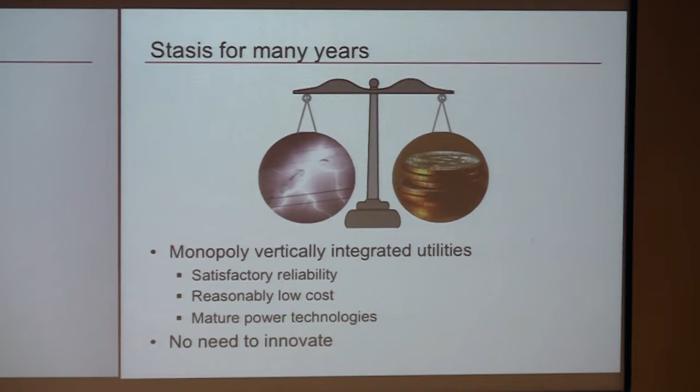And then something happened. We decided we need to go green. We need to reduce CO2 emissions. We need to integrate renewable energy sources, mostly wind and solar. So we went from having to balance just the greed and the fear to a three-way competition between cost, reliability, and being environmentally friendly. And we know how to keep the system reliable, balancing the reliability and the cost. But doing all three is much more complicated. We can be green and cheap, but we won't be reliable, or we can be green and reliable, but it's not going to be cheap.

So this whole business of smart grid, in my view, is really an attempt to do better in all three directions at the same time, essentially trying to improve the integration between those three competing objectives. Now, smart grids, lots of different definitions. We were talking about that this morning, and on my more cynical days I will say that people will define the smart grid as what they are trying to sell you.

I'll take a fairly general definition to say it's trying to use communication, control, and computing technologies to enhance the operation of the grid. The idea is that these technologies are a lot cheaper than copper, concrete, and steel that are the essence of the traditional power technologies. We can do things a lot more cheaply with smarts, communication, control, and computing than we can with building more transmission lines, building more power plants. So that's the whole idea, I think, of smart grids, but different people will define it in different ways.

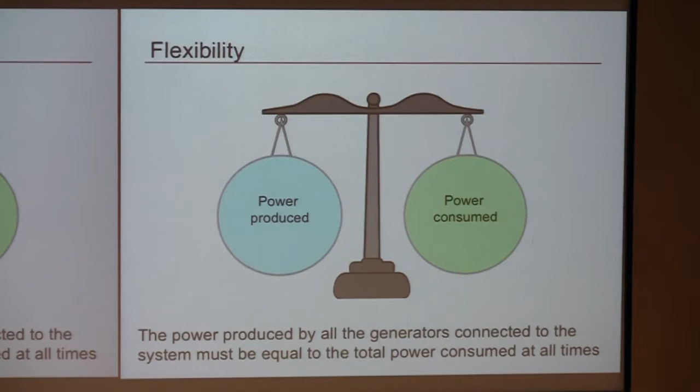So let's move on to flexibility. One thing you have to do, another balance you have to have in the power system, which is now a physical balance, is between the power that is being produced and the power that is being consumed. These two must be kept equal, essentially on a second-by-second basis.

So why does it have to be exactly equal? Is it because of storage? It's because we can't store, essentially the answer.

It's the ultimate in just-in-time manufacturing. The power that we are consuming now with this computer, these lights, is being produced almost essentially at this time. And if you have this imbalance, the frequency is going to drop and the system is going to collapse. So we don't want that to happen.

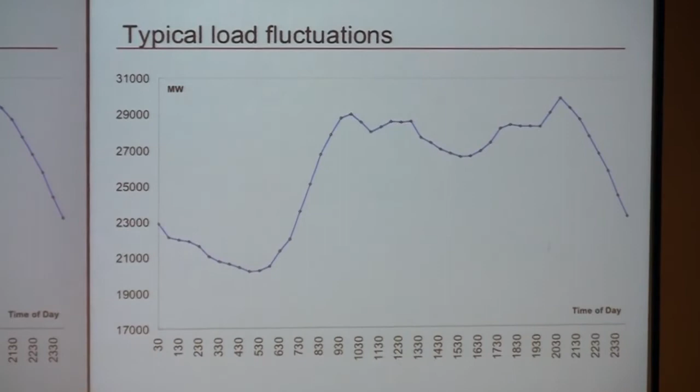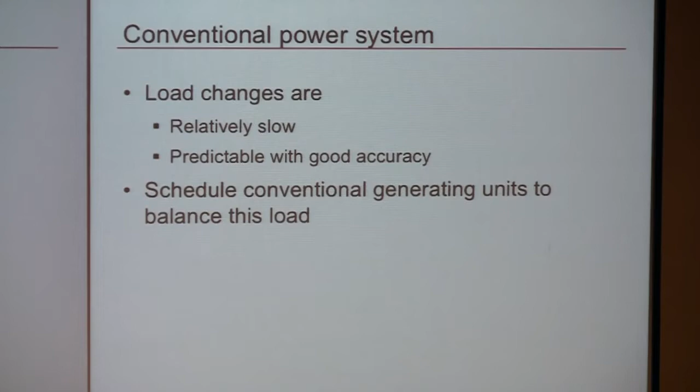So in the old days, these were the fluctuations we had to deal with. They were, you know, human beings, if you aggregate them enough, are fairly predictable. You could predict the peak demand for tomorrow with about a 2% error, even including errors in the weather forecast. And the ramps would not be too bad, so relatively slow changes, predictable with good accuracy. So we could schedule conventional generating plants, coal-fired, gas-fired, to balance this load. No big problem here.

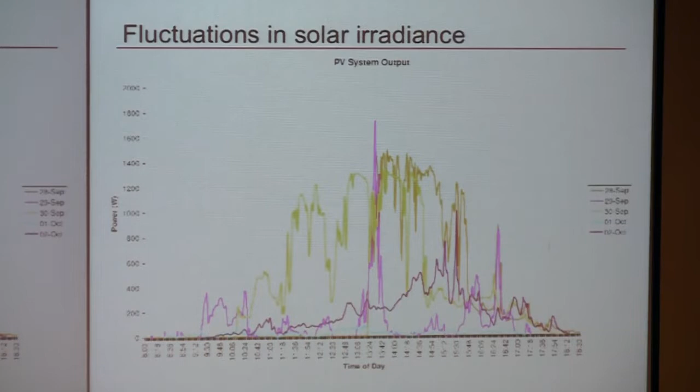But then we introduce renewable energy sources. Here I picked up a couple of graphs showing the output of a particular photovoltaic system on different days, with different days in different colors. You can see that different days are different, and even within a day it goes up and down depending on whether you have a cloud or you don't have a cloud. So you have very rapid and hard to predict fluctuations.

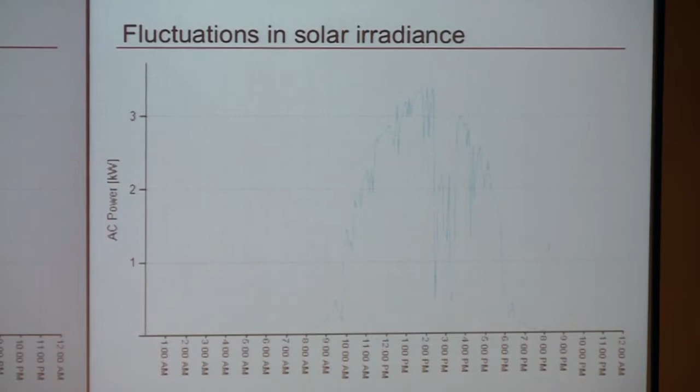Here's another example. Things look pretty nice. The sun rises, the output of the PV plant goes up, and then suddenly in the middle of the afternoon you have a band of clouds. It drops pretty dramatically and then restores. It goes back up and back down in the evening.

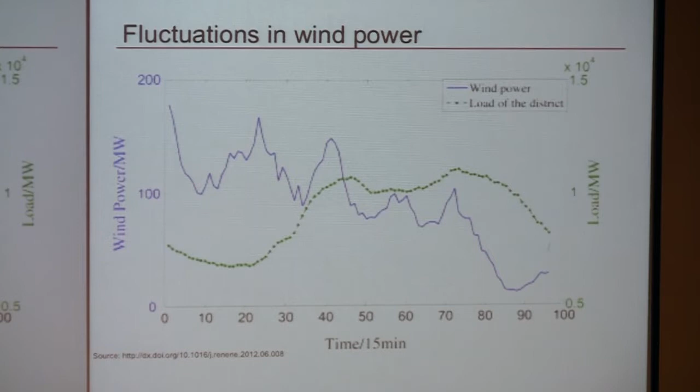And you also have problems with forecasting the wind. It's quite easy to forecast what the wind is going to be 15 minutes from now—your best guess is exactly what it's doing now. But if you try to forecast 24 hours, it's going to be pretty much all over the place. Not easy. So really, if we have a power system with more than a few cute wind farms or a few experimental PV panels, we may start having some interesting problems.

So instead of just looking at the load, now we should be looking at the net load, which is the difference between the load and what is produced by this renewable generation—which is essentially not controllable, which we let produce exactly what it wants to produce.

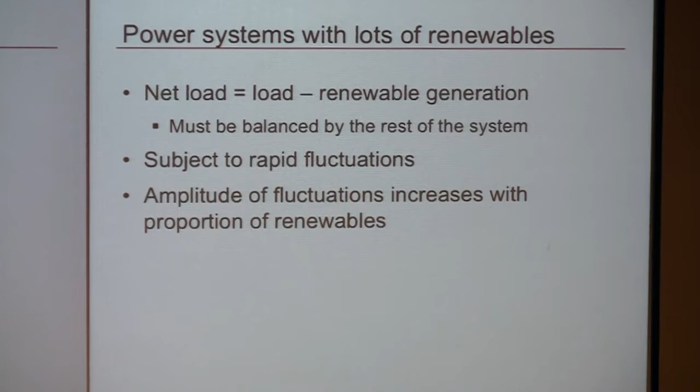And that net load must be balanced by the rest of the system. So your conventional generators are going to have to respond to those rapid fluctuations, and the amplitude of these fluctuations is going to increase with the amount of renewables that we install in the system. So over the future, we are going to have more problems.

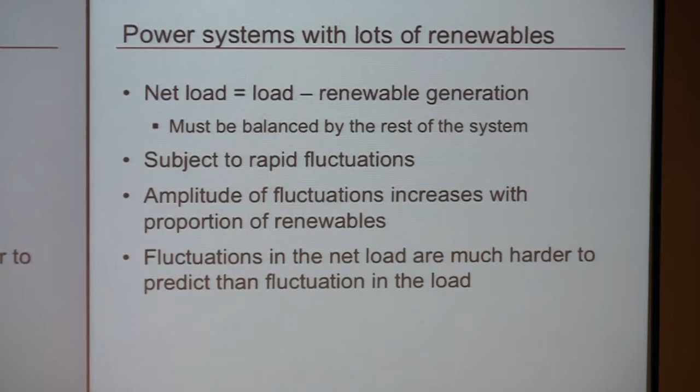And again, we are pretty good at forecasting what the load does. Forecasting what the wind generation, what the sun is going to do, is a much more difficult problem. So, how do we keep things in balance? Well, the standard answer is to say, well, the rest of the system is going to have to be more flexible. But providing flexibility costs money. That's something very important to keep in mind, because this flexibility is going to have to come from conventional power plants.

These conventional power plants, to keep them going, to get them going, you have to burn coal, you have to burn gas. If you have to bring online more of these conventional generating plants, it's going to be less efficient. You are going to be able to do a less efficient economic dispatch than you would be able to do if you could just predict what's going to happen and then not have to have this reserve to go up and down as the wind or the sun changes.

So the first question we want to ask is, well, how much flexibility do we really need? We could just say, I want a lot, because if I have a lot, I'll be on the safe side. And frankly, if you ask a power system operator, that probably would be their response, because they want to play it safe. Remember, reliability comes before cost from their perspective. They don't want to be blamed for an outage, so they want to have at their disposal as many resources as possible. But on the other hand, we are paying the bill, so we don't like blackouts either, but there's a cost to everything.

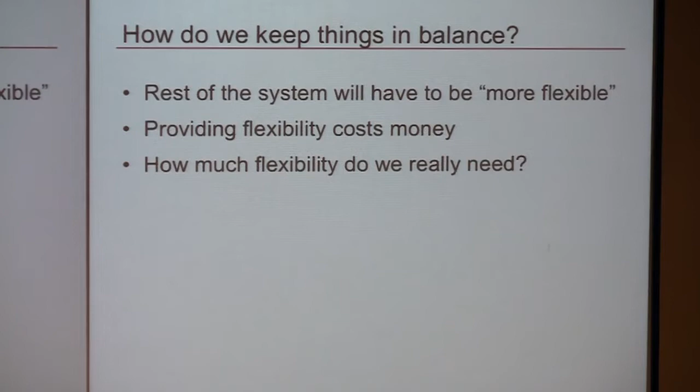The next question is, okay, let's suppose we know how much flexibility we want. Where should this flexibility come from? Well, typically it would be from these conventional generators, coal-fired, gas-fired. We can ramp them up and down. We might also try to get the demand, the consumers, to adjust their consumption in response to the needs. So if the wind is blowing hard, maybe we can anticipate and do the dishes now. If the wind is not blowing, maybe we can do the laundry later.

A lot of interest these days is going to storage, developing new battery technologies. That would be an extremely good form of storage if it were cheap enough. So chemical engineering, material science people have plenty of work to be done there to make that practical. Yes.

Storage, something they used to do in Belgium, with two lakes, you pump it up in the night and it goes back down in the day. Pumped hydro is still the more common economical way of doing energy storage, so it can be done. The problem with pumped storage is that the investments required are huge. The environmental impact is significant. There are not many places where you naturally have two lakes and a place where you can put the pumps and the pipes. So it's hard to justify. The technology exists, but it's a question of a technology at a reasonable cost.

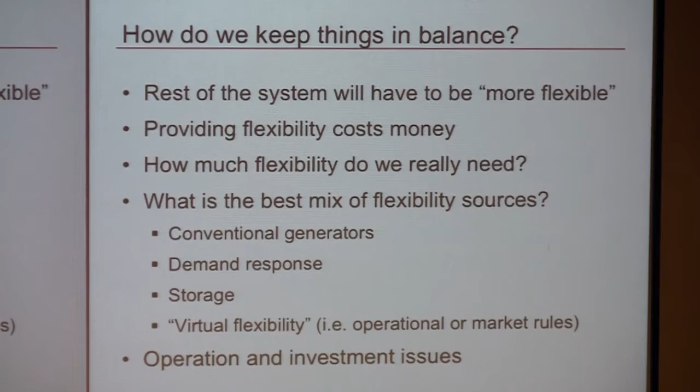So let's first talk about flexibility at the operational stage. Running a power system involves a lot of thinking ahead of time. You don't improvise, and there's therefore a lot of scheduling that takes place.

They think a lot today about what they're going to do tomorrow, because a lot of the power plants they use are large coal plants that don't start fast. To start them, you have to invest a lot of money in getting them going. So there's a lot of, in essence, an investment cost of getting that plant going tomorrow. So the question you have to decide is, which plant mix do I want tomorrow?

On one hand, I would want to run my most efficient plants, but on the other hand, I also want to have available the plants that I will need to go up and down as I face some uncertainty. So I need to figure out how much uncertainty I will face tomorrow, and then once I have an idea of that, try to optimize it, to do some kind of optimal scheduling calculation to decide which generating units I should start at what time.

Does the location of the plant matter too? Yes, because there's a network. But at this point, I'm going to ignore the network. I assume that I have a copper plate, that the electrons can go from any plant to any load for free. The real life is more complex than that, I grant you that. But for looking at flexibility, we'll ignore the problems that the network adds.

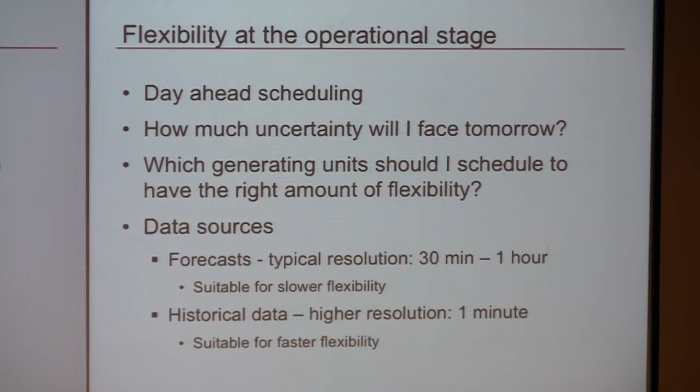So this is what we have been doing recently. My student and I got some data from Texas, where we got, I think, several years' worth of 1 minute resolution net load data from the ERCOT interconnection in Texas. Essentially, we know what wind generation there was and what load there was, and we therefore can calculate the net load with 1 minute resolution.

And that's the blue curve. But then you have what the schedule for the market was saying would be happening at each hour. And the difference between the red and the blue is the flexibility, the short term, intra-hour flexibility that we need to deal with. We assume that the market will take care of what happens every hour, but the system operator has to keep the system in balance in between those hours.

So if you take the difference between the blue and the red, you get a little diagram up here that shows the minute by minute values over every hour. And we assume that at each hour we are back in balance, and again we look at the flexibility needed for the next hour.

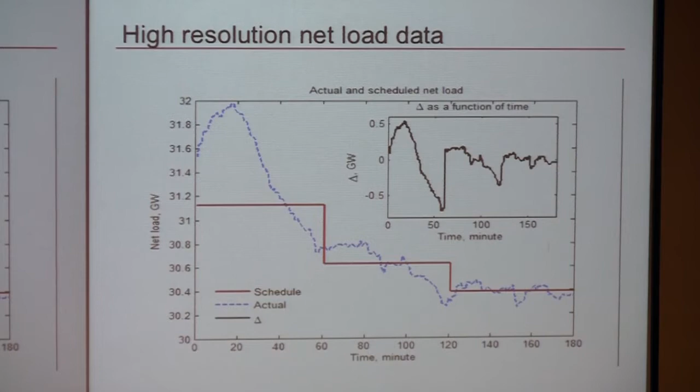So we take this whole, several years worth at 1 minute data, and we analyze this data. And we look at these variations. Really we look at three things: sometimes we need an increase or a decrease, so there's a question of capacity, megawatts. We have the rate of change, or the ramp rate, so that will be megawatts per minute. And whenever we have one of those ramps, we also want to know for how long it lasts.

So we analyze this data to look at events, and we represent these events by triads involving capacity, ramp rate, and duration. And if we plot that in a three-dimensional space, we get a cloud of points like here, representing the type of variability event, flexibility event, or lack of flexibility event that we had over this whole period. And if we have enough data, we get a probabilistic representation of what we should be able to deal with.

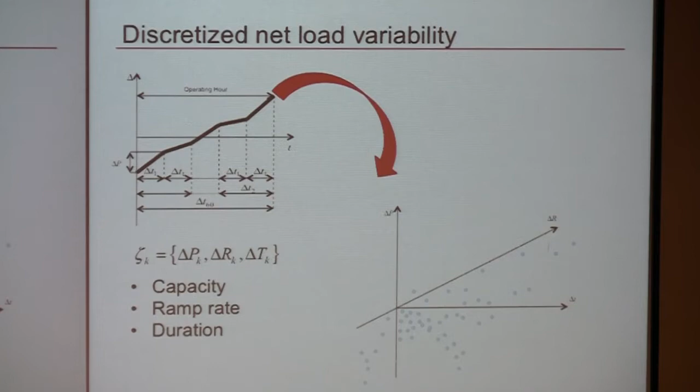So what we want to do is optimize the flexibility that we want to provide. We look at each of these data points and we try to figure out: should we include the ability to deal with this data point in our schedule for tomorrow? Or is this so rare that we decide it's not worth dealing with?

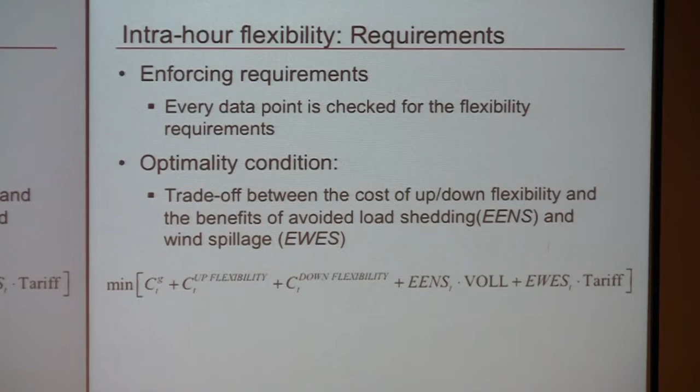So really we are looking at doing a trade-off between the cost of providing this flexibility and the cost of not providing this flexibility. Now, the cost of providing the flexibility has really three parts: the cost of producing the energy, the cost of the upward flexibility when we have an upward change in net load, and the cost of going down. Then we have these two other terms.

EENS is the expected energy not served, so that's a probabilistic measure of how many customers we will put in the dark for how long, because we don't have the resources needed to satisfy these customers. And we multiply that by a factor called the value of lost load, which is essentially a dollar value we assign to putting people in the dark for so long.

And then another thing that can happen is that we may have to spill some wind. But because these days the assumption is that we will not spill wind, if you do spill wind, you have to pay the wind generators for not producing. So there's another term there that's kind of a compensation for these wind generators when you tell them, sorry, you really have to cut back on your production. Economists don't really like this, but that's kind of a policy decision that has been taken in many parts of the world, that we are going to use all the wind that is being produced.

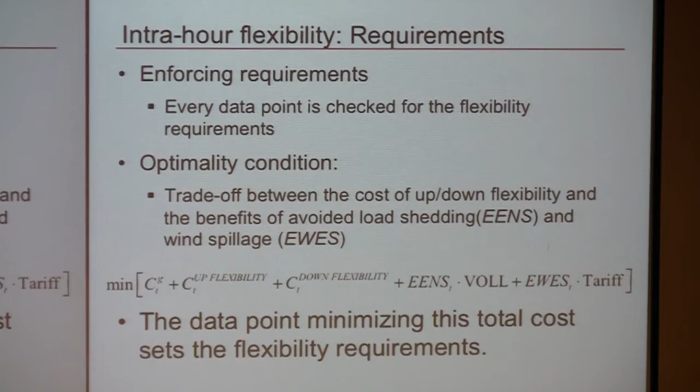So we essentially, for each data point, decide whether we want to include it, and the last data point we decide is worth including sets our flexibility requirements for intra-hour flexibility. And if we do this for the data, these are some types of results that we have obtained.

There are times of the year when your wind tends to not just blow more, but also change more rapidly. And being able to adjust those requirements depending on the time of the day and the season of the year could represent quite a substantial saving. Because if you put the same blanket requirement across the year, sometimes you will have too much, sometimes you may not have quite enough.

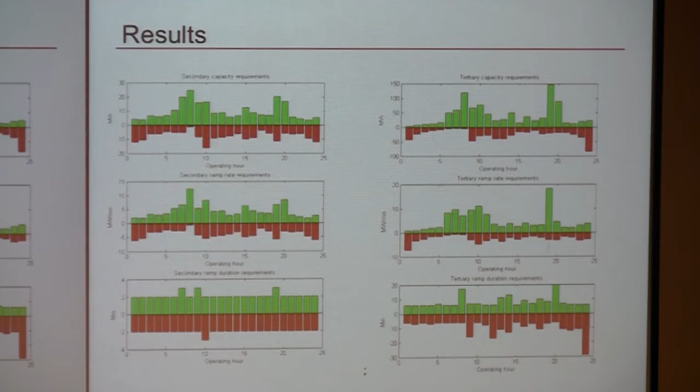So this is the kind of work we do in terms of flexibility at the operational stage, dealing with the resources that we have. With some students at the University of Manchester, we also looked at flexibility at the planning stage. And then the question is, how much flexibility do I need to build to accommodate the renewables generation that I expect in a certain number of years?

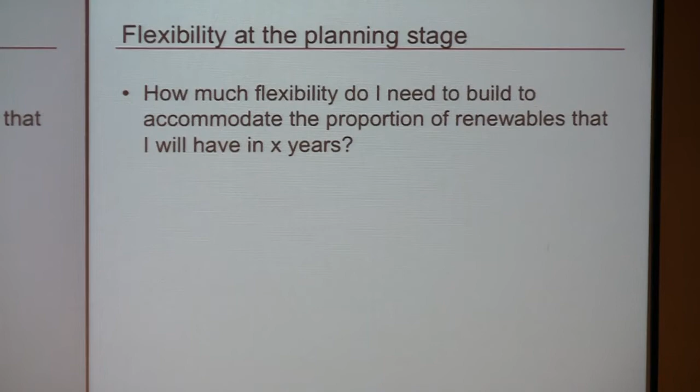If the amount of renewables keeps increasing, I will probably need to have more flexibility. I want to make sure that that flexibility is available when I need it. And now we are not looking just at minimizing the operating cost, but we're also looking at minimizing the investment cost. So essentially we're looking at minimizing the total cost, balancing operational cost with investment cost.

We might be able to accommodate with less flexibility, but that might really raise our operational cost. And we could build too many facilities, so spend too much on investment, but then we have very low operating costs. So we have to balance the two. So for this analysis, we made some assumptions.

We assumed that we are still dealing with a centrally planned system, so that we don't have to deal with the complexity introduced by an electricity market. We're just assuming that somebody is looking at the whole picture and can decide how much flexibility needs to be built. We're only looking at flexibility provided by the generation.

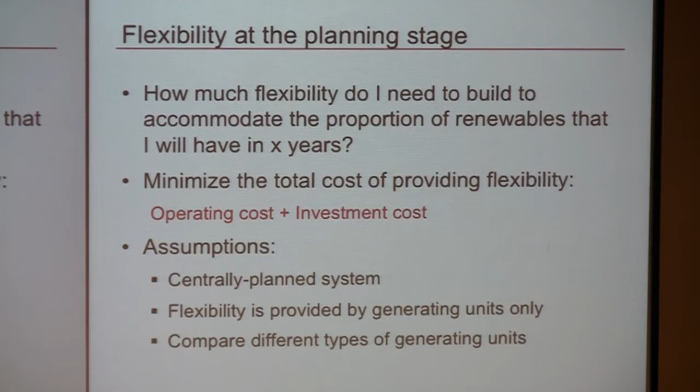We can extend that work. We've done some of that since to introduce also flexibility from the demand side. So we're really looking at how do we compare different types of generating units in terms of the ability to provide flexibility. And the basic tool that we started from is the unit commitment.

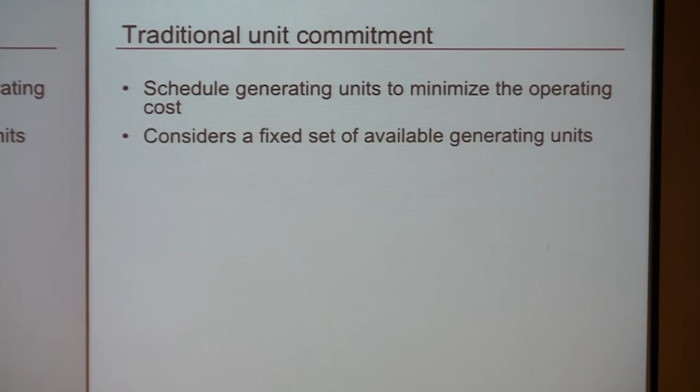Now, the traditional unit commitment problem has to deal with scheduling generating units to minimize the operating cost. So essentially, you assume that you have a fixed set of generating units, and you can pick which one you are going to start at what time to meet the load profile like I showed you earlier.

And that's done with a certain number of dynamic constraints, for example, up and down ramp rates, and minimum up and down time, which is essentially the number of hours the unit has to stay on when you turn it on, and the number of hours it has to stay off when you turn it off to avoid damaging the plant. So we have some of those dynamic constraints. So we're really looking here at inter-hour flexibility, deciding how much flexibility we need at each hour.

Now, as in any optimization problem, if you give yourself more resources, you're going to reduce your objective function. You'll be able to do a better job at meeting the constraints at a lower cost. But this traditional unit commitment ignores the investment cost. And it typically only looks at 1 day to possibly 1 week.

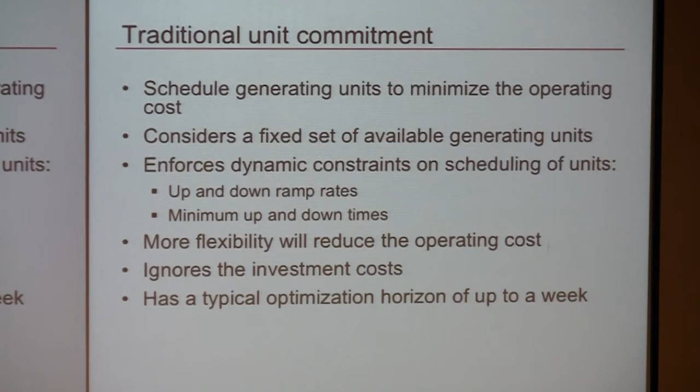So it's a starting point, but really what we want to do is to enhance this unit commitment to consider both the operating cost and the investment cost. And the idea is that we are no longer going to consider just a fixed set of generating units that are built, that are available. We're going to consider a variable set of generating units.

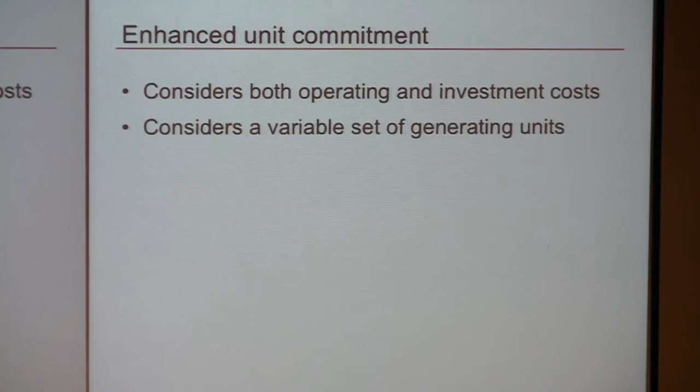And so our decision variables are going to be not just is this unit generating at this particular hour, but also does this unit exist? Have I taken the decision to invest in this generating unit?

And backing up one of my bullet points there, because I am looking at investment decisions and I'm not going to build a power plant just to run for a day or a week, I need to run this over a much longer period of time to see whether building that power plant is justified under a variety of conditions. Because there might be seasons where it's worth having, and seasons where it's not a good deal. So all of that needs to be taken into account.

And typically unit commitment these days is solved using mixed integer linear programming. It's already a challenging optimization problem when it's run normally on a large system. But now I have added these extra decision variables of whether a unit exists, which was not in my original traditional unit commitment. So I have really expanded considerably the size of the problem. And if you have done mixed integer linear programming, you can think that I'm heading for trouble here.

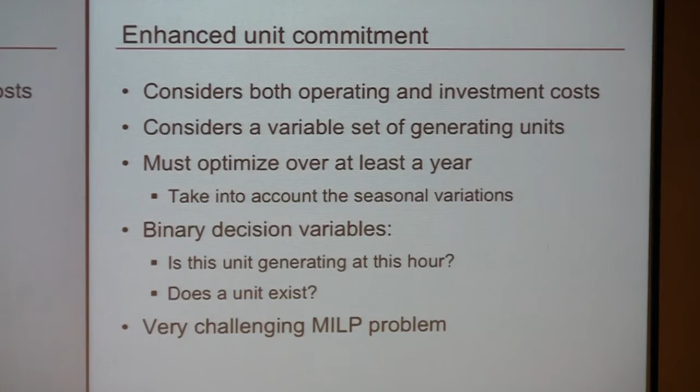Okay, first thing we had to admit is that we were not going to be able to run this enhanced unit commitment for an entire year, considering the 8,760 hours that you have in a year. We decided, okay, what we need to do is to use representative weeks of what happens in winter, what happens in spring, what happens in summer, and again in the autumn.

We don't give them all the same weight. We have more summer weeks than winter weeks, and we have very few extreme weeks to keep things balanced. And then we used some clustering techniques, looking at the net load data to identify the most representative weeks that we needed to consider in this optimization.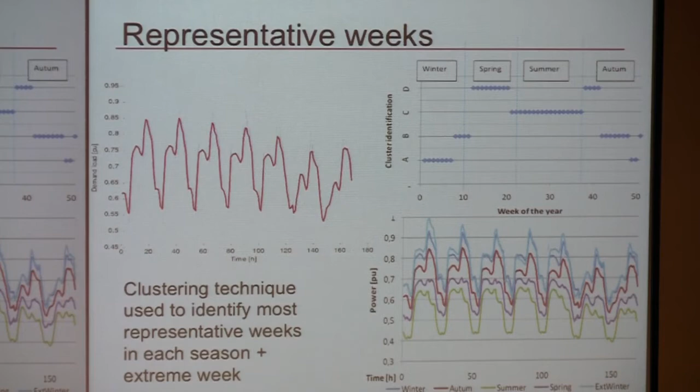Now, as I said, mixed integer linear programming is wonderful, but if you're not careful, it's going to blow up in your face. So we had to do a bunch of things to keep the lid on the CPU time. The first thing is reduce the number of decision variables. Well, essentially we said, let's assume that some of the generating units, we know they are there, they're already built. We don't need to consider those, because that would just make life more complicated than it needs to be.

We could also start from a reasonably adapted system. If we know what the peak load is going to be, we don't want to have 3 times as many candidate units as this peak load, because that gives too much flexibility. So we should have a rough idea of how much capacity we should be considering before we start the optimization.

And then another thing that happens in power systems is there are lots of units that have essentially the same characteristics. Well, if you treat them all as independent units, it's essentially going to churn through lots of combinations that are essentially the same. So we developed this priority ordering constraint that said, if you have units that are essentially the same, always use them in this order: 1, 2, 3, 4, 5, instead of trying all the possible combinations. That also cuts dramatically the number of combinations that we have to consider.

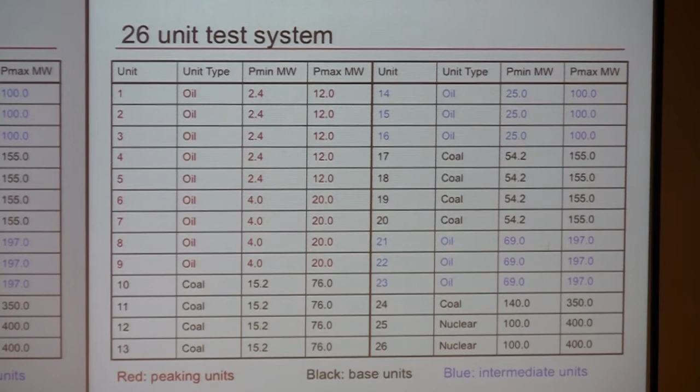So these are some test results we got with this analysis. We had a 26 unit system. Some of these units are what we call peaking units, which tend to be the very flexible but rather inefficient ones. The black units are the big nuclear units, so they are very efficient but very inflexible. And then we have some blue units, which are somewhere in between the two. And the question is, okay, which of these units should we rebuild?

Well, we first started with some different load profiles, kind of checked that our optimization gave results that made some sense. So we have an original load profile, a load profile we made a bit smoother, and a load profile that we made a bit sharper, with the idea that the sharper load profile would require more flexibility than the smoother one.

And we checked that with the original load profile, the first row in this table, of those 26 units we had, we should probably do without unit 9 if we had a choice. With the smoother load profile, which also has more energy demand, we should have all the units. And with a sharper one, we should keep unit 9, but take units 2 and 5 out. So that was just the point of checking that things were kind of working naturally.

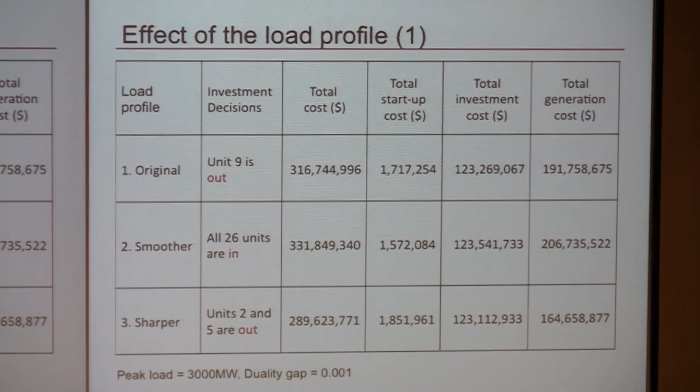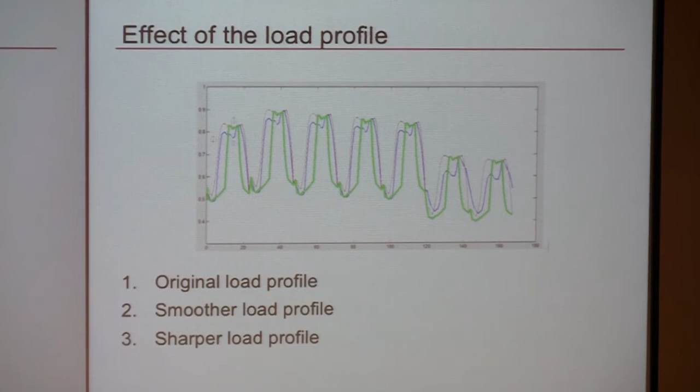Is the conclusion then that it's quite sensitive to the profile? Because if I look at the picture that you had in the previous slide, it looks to me that, sure, there are variations, but they don't seem to be that large. Right, okay, here we are, the first part I was talking about, intra-hour, very short flexibility. Here I was looking at some inter-hour flexibility, which is a bit slower type of flexibility. So that is the reason why you see this difference? Yeah.

So the next thing we try to do with this is, okay, what's the impact of wind generation on the flexibility requirements? And there we need to look, there are different things that happen at the same time. So we have to try to separate them. So first, if you have more wind generation, well, it's going to displace your conventional generation. So the energy requirement is going to go down.

The next effect is that because wind is harder to predict, we are going to have to provide more reserve, more essentially units that can ramp up and down. And so the traditional criterion for reserve would be that you would provide as reserve the capacity of the largest unit that is currently connected to the system. But when you have uncertainty due to the wind, people have suggested that you should add 3.5 times the standard deviation of your forecasting error. Just as a rule of thumb, we are trying to refine this through our work in the intra-hour flexibility, but we hadn't done that yet when we did this work.

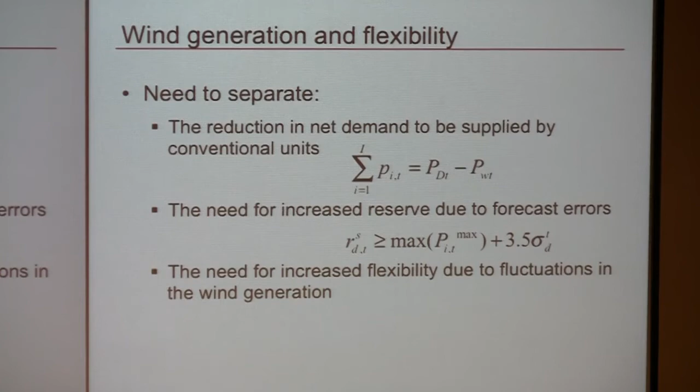And the third phenomenon we have to consider is because we have those fluctuations in wind, that in itself will increase the need for flexibility. So we came up with 4 test cases to look at these effects. So case 1 is our base case, where we have no wind and no forecasting error. Case 2 is essentially adding the wind, but assuming the wind is nice and constant, which is totally unrealistic, but it's a way of separating the cases.

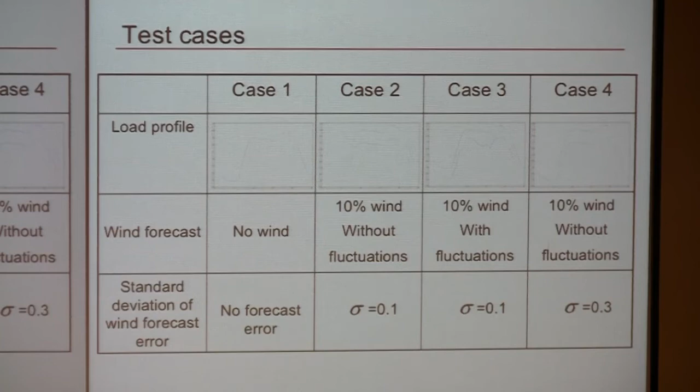And also assuming we have a pretty good idea of what the forecasting error is going to be, so a sigma of 0.1. Third case, we have 10% wind, but then we consider this wind is going up and down, but still good forecast. And the fourth case, we assume 10% wind, but no fluctuation, but then we have more error in the forecast.

And we were pleased to see that for these different cases, we came to different optimal portfolios of generating units. So you can see that some units are definitely not needed. For example, unit 13 tends to be out most of the time, but depending on the other cases, different sets of units are what is required.

Now case number 2 is, as I said, just wind where you essentially are cutting 10% off of your needs for generation. Well, obviously that's the one where you would need the smallest number of generating units, so you could remove these from your set of available generating units.

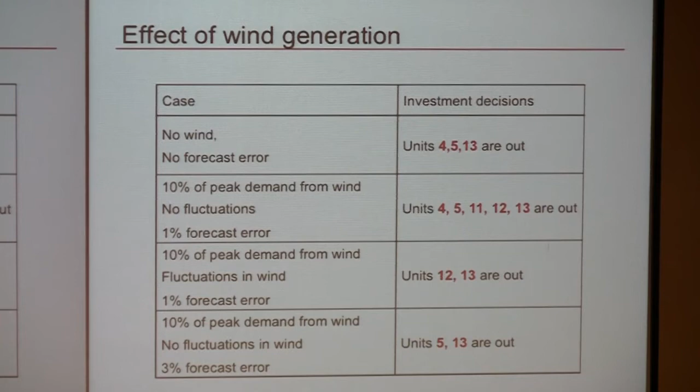So, time for some conclusions. I think I've argued that it's important to quantify how much flexibility the power system needs, because as I said, providing this flexibility costs substantial amounts of money. And these flexibility requirements are going to depend on the amount and type of renewable generation. I've kind of mentioned both solar and wind. They don't have the same stochastic characteristics. So depending on whether you have a lot of wind or a lot of solar, the flexibility requirement will be quite different.

It also depends on the rest of the system that you have, the load profile that you have. I mentioned in the Pacific Northwest, the wind blows at night. In other parts of the world, it blows at different times of the day. That depends on your geography. And also, these flexibility requirements are going to depend on the season, the day of the week. You don't need the same flexibility on a Sunday as you do on a Monday, and the time of the day. That's also quite important.

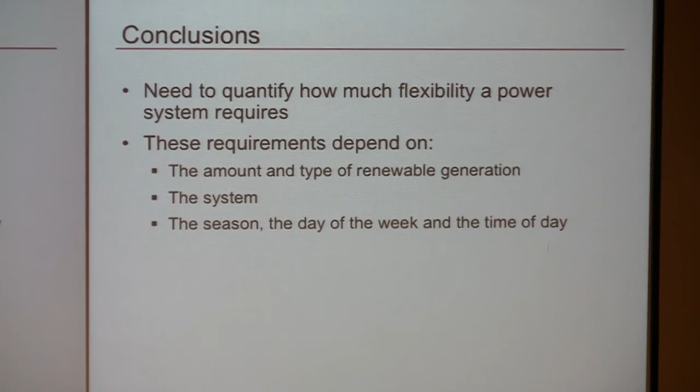And I also argue that optimizing the flexibility requirements could save a lot of money in operational cost and in investment cost, while hopefully keeping the reliability of the system high.

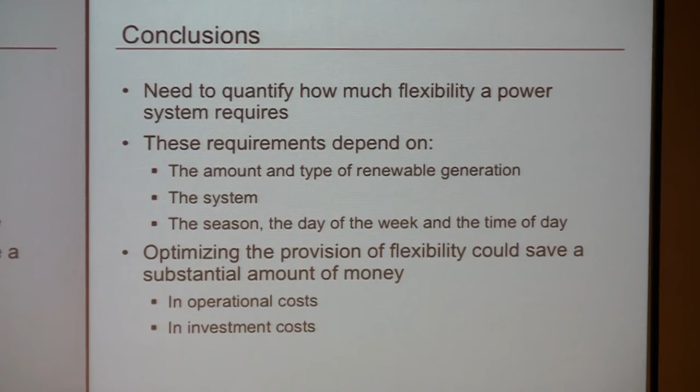So in terms of looking forward, where are we going? Well, currently the industry is quite a conservative one. They like to do things the way they have always done. They tend to have fixed flexibility requirements. Well, if we could adjust these flexibility requirements depending on the time of the day and day of the week and season of the year, that could already be quite interesting.

We need to look in more detail at how the flexibility requirements are going to change as the proportion of renewables increases. And that's not an easy thing to do, because it's going to depend on where we build them and how much correlation there is between the different wind farms.

One thing to keep in mind is, the big cost in a wind farm is the cost of building it. Once you have built it, you want it to run as much as possible, so you want to put it in the place with the most wind. And that's the reason why the wind farms tend to congregate all in one place. And then you get a lot of correlation between the wind in that region.

If we can have a place where they are in different locations or connected by transmission, you can aggregate over a more diverse pool and therefore reduce the problem associated with the need for flexibility. But that's hard to predict as we go forward.

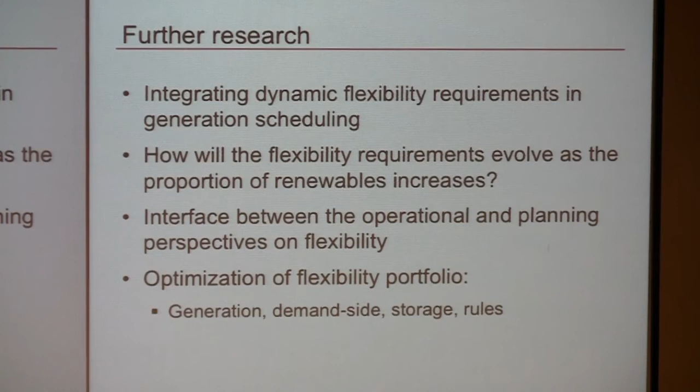So I talked about flexibility in the operational timescale and the planning timescale. So far they have been treated slightly differently. What we need to do is try to bring the two together based on the work that we do on the operational time frame, introduce that into the planning time frame. And also we need to look at not just flexibility from generating units, but also what we can do with the demand side, with storage, and with market rules, and how these market rules affect the need for flexibility.

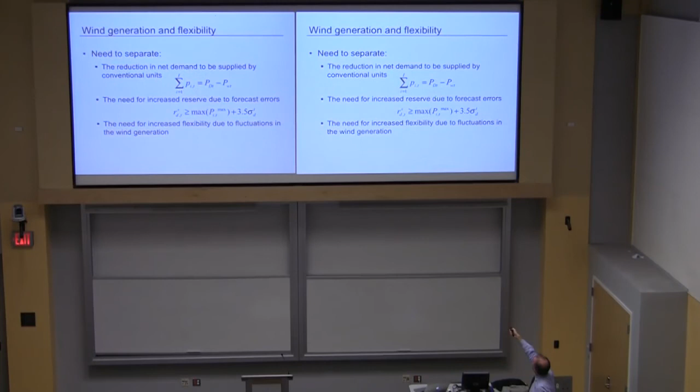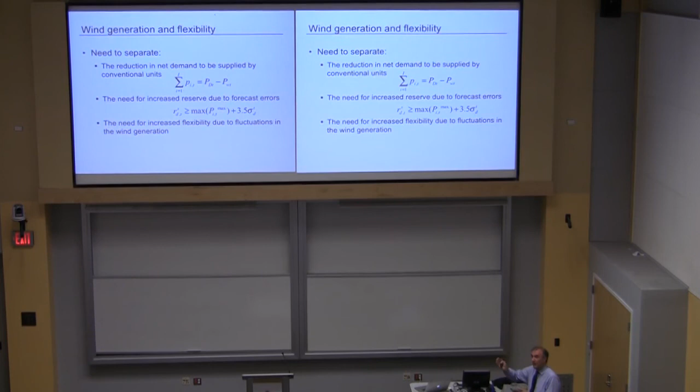Right, it came from the fact that we were simply adding a certain amount of reserve to deal with the uncertainty. So the need for reserve comes from dealing with the forecast errors—that's giving yourself flexibility for the unknown. And then there's flexibility for just going up and down in the way you expect. It's dealing with variations you expect, and dealing with variations you don't expect but know might happen.